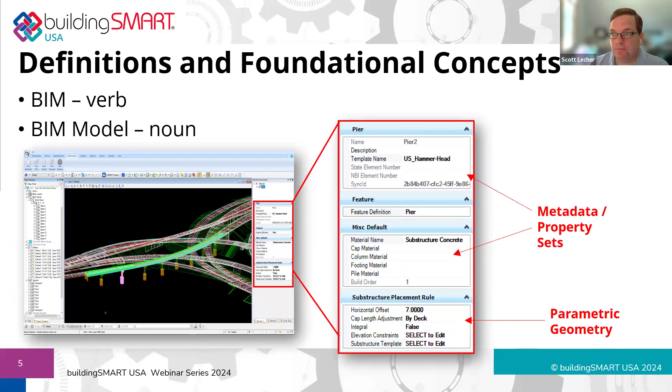Okay, so a few openBIM principles. I'll step through this quickly, but essentially, I like to think of it as primarily a collaboration process, and it's vendor neutral. So it allows folks to work in the environments that they're most comfortable with, and provides you the ability to work in the best tool for the job, and not necessarily have that dictated based on potentially external factors like where your data is being hosted.

In terms of openness, the open part of BIM can mean multiple things, right? Primarily, in my view, this means a published specification that's open, that can be used for developing and sharing and understanding the exchange of engineering data. But it can also mean open as in it's easy for you to open it and take a look at it. For example, here we have an example IFC model in the most common file format, the plain text STEP physical file. You can actually open it up in something like Notepad or VS Code and take a look at it. Now that may not be the way that most people interact with IFC, but it is a potential.

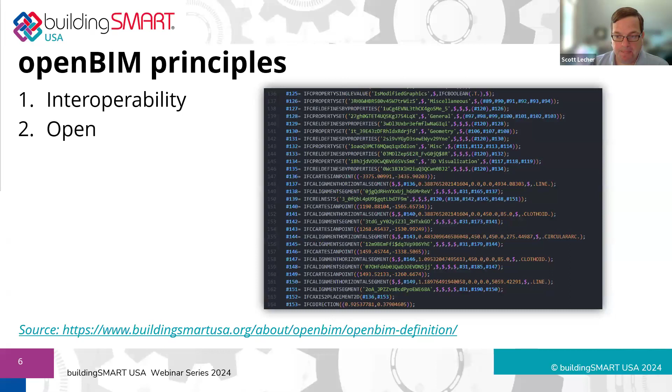Because of this openness and because of it being openly documented and tested, that adds reliability to the process. And I had mentioned collaboration, right? Everybody gets a seat at the table, regardless of their particular tools or workflows that they like to bring. And then flexibility as well. And ultimately, there's also the concept of sustainability, right? Over the long haul, data that's stored within these formats and to these specifications can continue to be accessed over multiple decades, which is oftentimes the time frame we're talking about with infrastructure assets that have a design life of potentially 100 years or more.

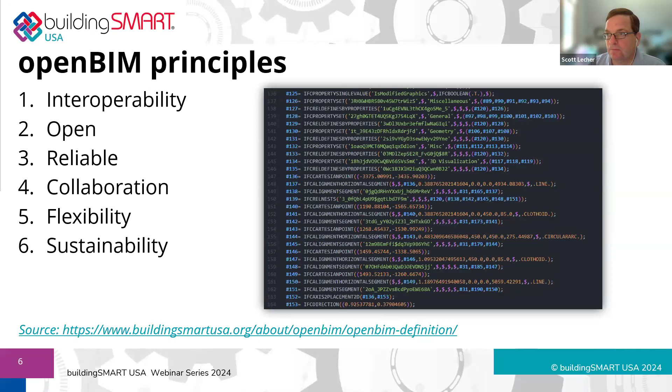So I'm going to hone in on a couple of things that speak to me in particular: interoperability and flexibility. When we're talking about openBIM as part of contractual language or a contractual requirement on a project, we're primarily talking about a data specification, and we're not talking about means and methods. So to do a compare and contrast with what you sometimes see in design in terms of standards compared to what we do during construction.

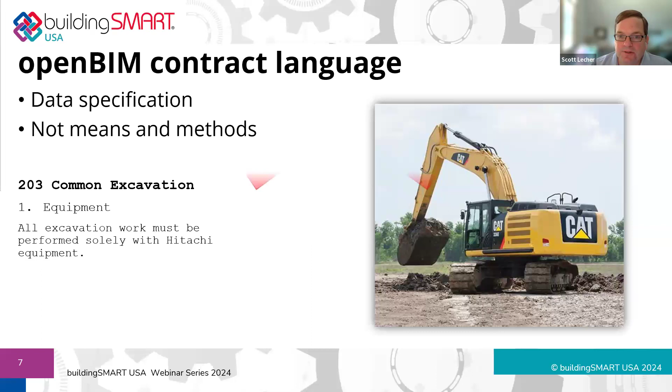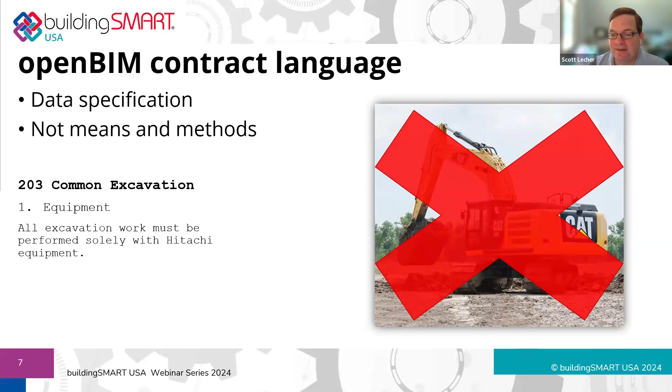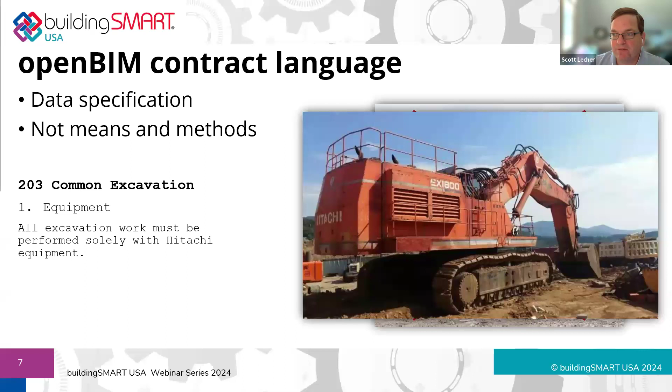Think about if you were reading a construction specification specifically around common excavation. One of the things that you wouldn't see is a restriction on the brand of equipment that a contractor is able to use, right? Because that would be very much dictating means and methods. So just as an example of what you wouldn't see: a spec that says only a particular brand of equipment is allowed here. And so, this is better. The point here is that you wouldn't see this in construction, and so it begs the question of why we see that sometimes in design during the development and procurement phase of our projects.

Okay, so what I see as the foundation of openBIM is Industry Foundation Classes, or IFC. As I mentioned, this is the main specification for the data that we're talking about with openBIM. Again, standardized, digital, open, and international in scope, and has multiple use cases. One of the things that I'll mention a couple of times, and we'll get into in more detail later in the presentation, is not to think of IFC as a file format, but rather as a specification for the data.

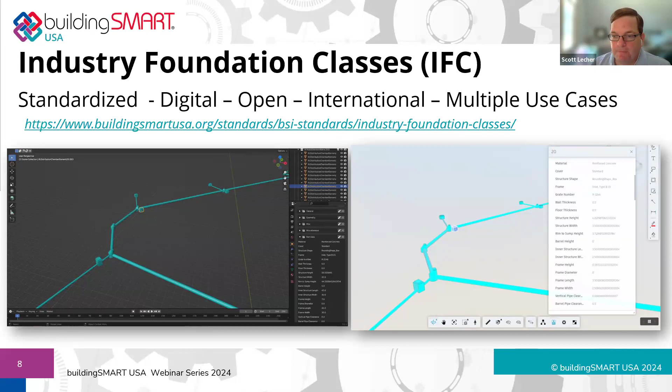Okay, so I mentioned as part of the demystifying approach that I was going to draw some connections between openBIM concepts and generally familiar concepts in industry. So the first connection here that we'll make is between IFC and DXF. And so I would probably wager that it's a safe bet that most people in industry in our line of work have come across DXF files at one point or another. In some ways it's kind of the lowest common denominator, again, that allows for exchange of drawing information.

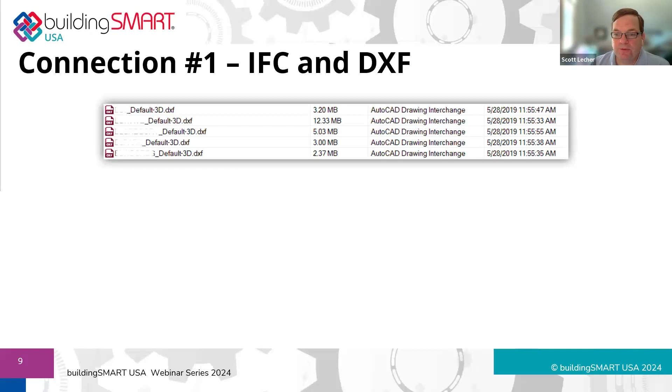So a couple of similarities here that I see between DXF and IFC is that there's strong support and a lot of focus on geometry, as well as being able to segment information into various layers that allows for breakup by presentation, being able to turn certain things on or off, also driving the display of various elements in terms of, say, color and line weight and line style. And also, I think maybe primarily, that multiple tools can read and write this format. And so, as I mentioned, it becomes at least one rudimentary way to exchange information between systems.

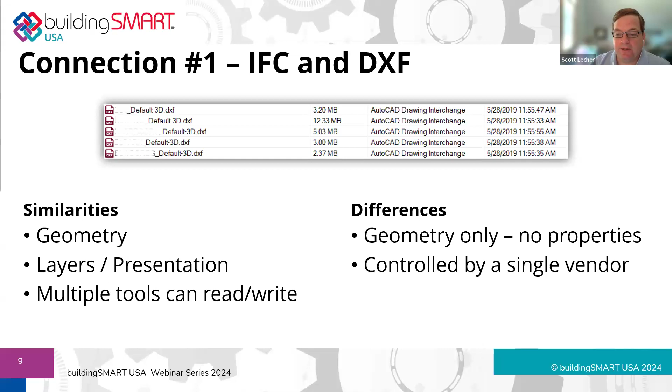So then some differences here, at least on the DXF side, is that it really is geometry only. You don't have the second part of BIM that I had shown previously, the metadata and the property sets. And this is an example too, where the DXF format is controlled and defined by a single vendor. So again, not having the same level of openness and international standardization as IFC.

All right, so moving along, another connection that we can draw is between IFC and an ASCII points file. And at least in my experience, this is most commonly seen in the collection of survey data. So the surveyors and surveying technicians will be out in the field and make their various measurements to collect the data, then process it and adjust it and calibrate it, and then typically it will be delivered in text format, similar to this, either with spaces or potentially commas.

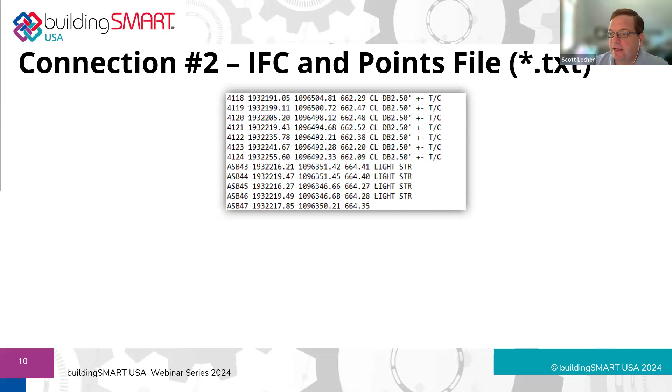And so we've got, again, some similarities here that we'll draw between IFC and our venerable ASCII points file, right? So it's similar in that the points data, like we're seeing here, is vendor neutral, and it's plain text, right? So you can open it in Notepad or another similar type of editor.

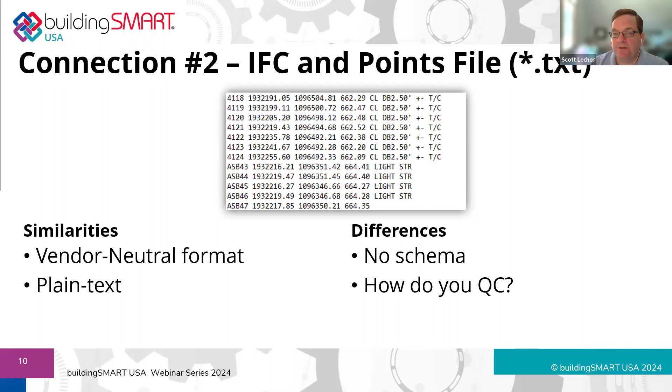But some differences here in terms of the points file is that there's really no schema defined here, right? There usually isn't any information in the header at the top. So you sort of rely on just typical practices of the data normally being formatted with a point number and then northing, easting, elevation, and description. So that can lead to some ambiguities, right? If some of those columns are switched for whatever reason, then you can have some issues being able to effectively share that information and exchange it between systems.

And then also, I think crucially, a big difference here is that the process for doing quality control on points files can be very manual, right? It typically involves opening up your authoring platform and importing this information and doing some visual review. And so oftentimes that can be a bottleneck for the receiving party, that there's some effort there to review the data during the exchange before it's brought forth into the next system and the next step in the process.

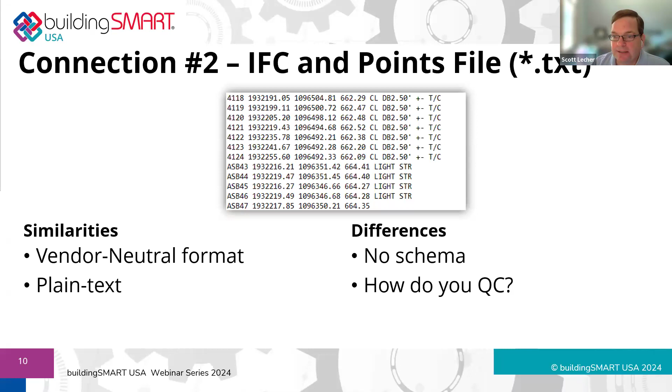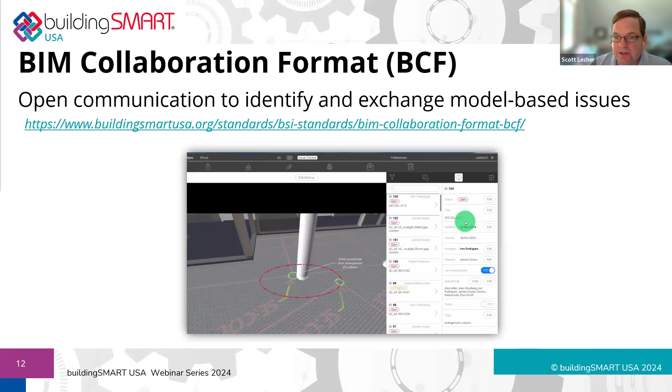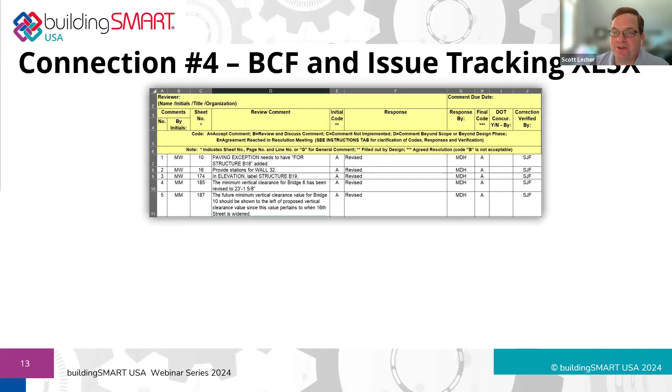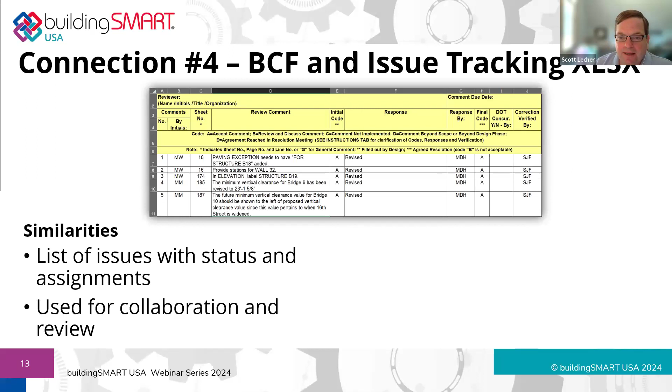So the connection that we like to draw here is to compare BCF to what I would call the venerable issue tracking spreadsheet. And again, this is fairly common across our industry. And so some similarities here is that in both cases, we're talking about a list of issues with status and assignments, and it's used for collaboration and review.

Some differences here with our spreadsheet is that it's really text only. It's not graphically tied to plans or any specific elements or objects in our BIM model. And the specific format and layout will vary and potentially could get broken by the end user, right? If someone's not careful about adjusting columns or adding columns or whatnot.

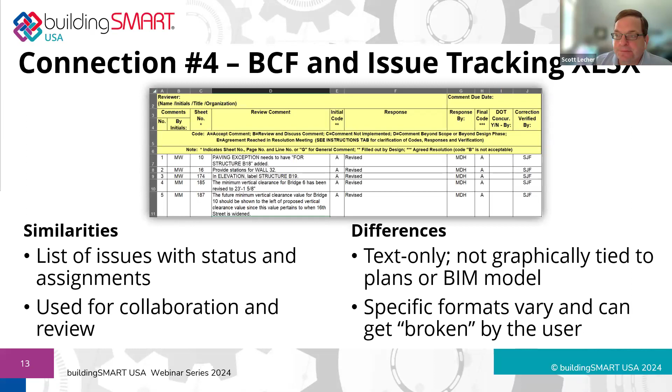So this is a good point that I'd like to make a little bit of a step back and talk about some more recent developments, at least within our organization at HNTB. Within our quality management process, we have standardized forms for record keeping for these various quality control steps. And we can see here on this slide a similar example of what we were looking at before, right? A comment resolution form.

And what we are currently progressing towards is, as we move more and more into digital delivery and work through the application of our quality management systems and quality management processes to digital delivery and model first development, we see a really great opportunity to be efficient across the board by standardizing on openBIM formats like BCF in particular. And so what this allows us to do is to utilize the same process and the same data formats for this part of the quality process, really across the board, across all of our projects, right?

So regardless of the software tools that are being used for authoring the models, and any tooling or systems that are being used for collaboration and review checking, similar to what we had talked about. As long as these systems support BCF, then that allows us to get to a common point where we can aggregate all of that information and then report it in the same format that all of our designers and practitioners and project managers are used to and familiar with, and provides the same quality record across the board.

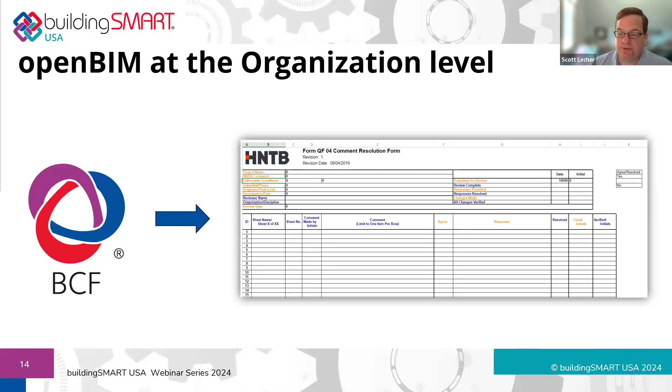So this is really valuable to us and promising to us, because it means that we can develop this workflow once and then apply it essentially universally across all of our projects. Again, regardless of what specific software tools are in use on any given project.

Okay, so moving along in openBIM terminology to information delivery specification, or IDS. So this is a machine readable specification to define the requirements for an exchange in an information exchange. And IDS is much newer than IFC. The initial version 1.0 has now reached final status. And I believe this has happened pretty recently, maybe just in the last month or so.

Some examples here of what we have started to use IDS for. This particular example that I'll talk through comes from a project where we're doing a significant amount of subsurface utility engineering and modeling as well. So anyone familiar with that type of work, you've probably heard of the quality level designation. And this is part of multiple standards that are documented by ASCE, amongst others.

But the quality level sort of refers to the ability of a downstream user to be able to rely on the information that is modeled or provided as part of those model elements, right? And so because these items are underground, it's hard to access them. And if it's something that's maybe been in place for multiple decades, then it's common that it's hard to find the records of what was actually built, what materials, how deep they are, location, all of that sort of information.

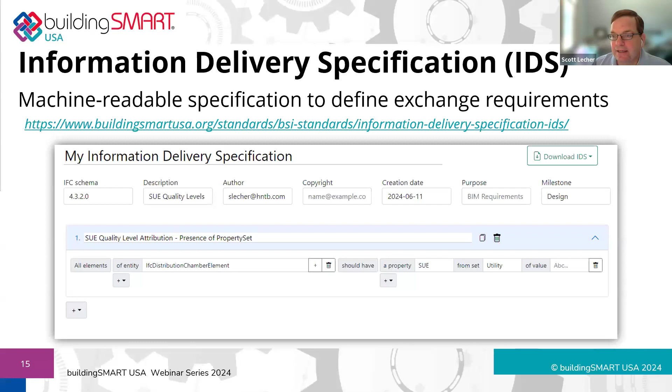And one of those requirements is that all of the model elements have a property set that's called utility, that contains a property called SUE, S-U-E, for subsurface utility engineering. And the values need to be either A, B, C, or D. So here on this slide, we see one example of a potential web-based interface for building out those specifications. And then you can see in this example, there's an option to download the IDS file.

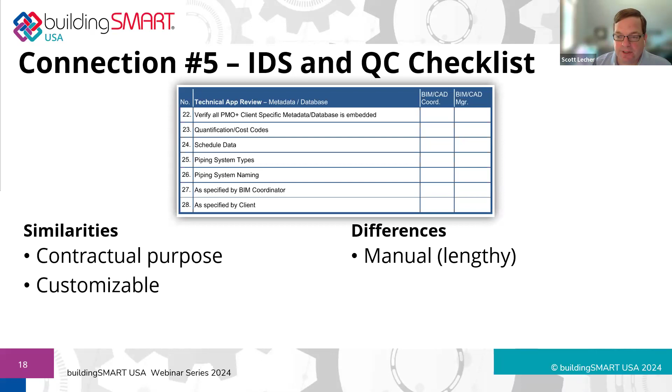So then some differences here in terms of the QC checklist approach, that it's a manual checking approach and can take a lot of time because of that, as compared to what I had said in the example with checking the utility networks, of being able to check thousands of objects in a matter of seconds. The other item that is a little bit unique that I'll talk about a little bit more here is integration with the buildingSMART Data Dictionary, or bSDD. And so the data dictionary is a standardized way of publishing these information requirements that IDS can then check against, right?

So if we think back to the example where we were defining the specification for quality level, we had to specify the name of the property set and then the name of the specific property, and then list those 4 values that would be considered valid for that particular specification. So all of those types of requirements can be stored in a data dictionary, and then it's online and it's in a single spot. And so then that data dictionary can spell out all the requirements for an information exchange.

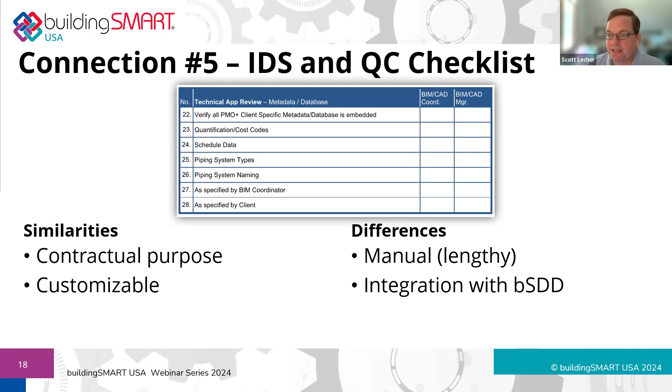And in our current discussions and work that we're doing with the transportation agencies in particular, we're talking through what that looks like with things like pay item information. So an agency could publish the pay item names and numbers and units as part of a data dictionary. And then you could utilize IDS to check models against those requirements as part of quality control during an information exchange.

And then there's also a similar parallel here for us at the organizational level, utilizing IDS, again, as part of our quality management system, and being able to standardize on that in the spirit of openBIM, and providing the flexibility of having one process, one tool chain, so to speak, that handles model checking for us across all of our projects, again, regardless of the specific software tools that are being used on the project.

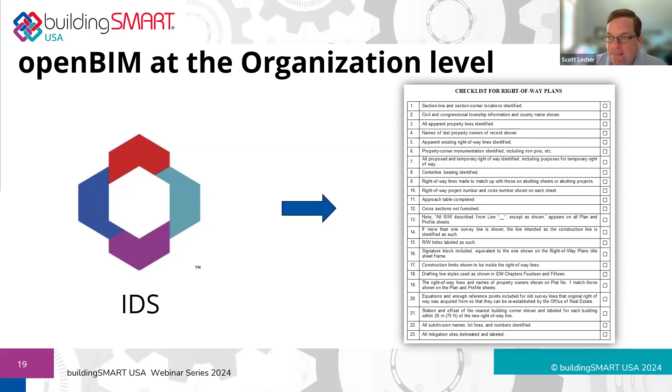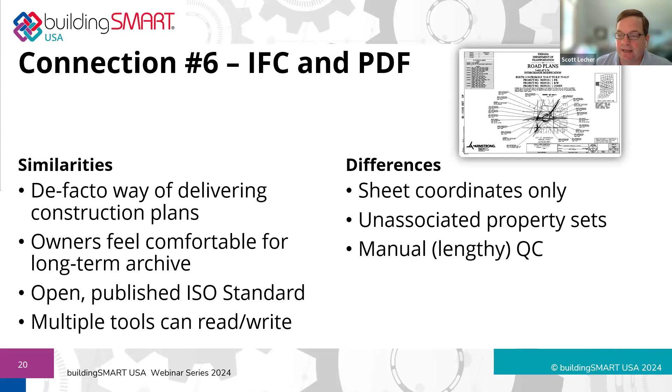So lots of benefits here in terms of the similarities. Some differences when looking at PDF compared to IFC: essentially we're just operating within sheet coordinates, and PDF at its core is really more about a set of instructions for painting a picture on the screen, more so than actual geometric data. In the case of PDF, you may have property information that's part of the sheet, but it's not necessarily associated to its corresponding geometry. And again, a familiar refrain here is the lengthy process of QC of PDF sheets compared to some of the things we can do with IFC, in particular IDS and buildingSMART Data Dictionaries.

Okay, so we'll shift into part two here and cover some additional new ground compared to the presentation from last year. So I want to talk about model validation, and then also talk through some examples of openBIM in action for digital as-builts.

So first, in terms of model validation. I've mentioned this a couple of times in terms of thinking of IFC as a schema and not a file format. And technically, there are even multiple valid file formats for IFC exchange. The most common is the STEP physical file, .ifc. But there's also a zipped version of that as well that could be utilized, or XML-based file formats for IFC exchanges, as well as RDF and TTL for more semantic web modeling of the information.

But when we're talking about model validation, again, we're thinking of it as a schema, and a good way to think of a schema is a specification for your data. And essentially this boils down to a pass-fail test, right? You're looking at the data in a model and determining: is this valid? Is it in accordance with the specification for the data or not?

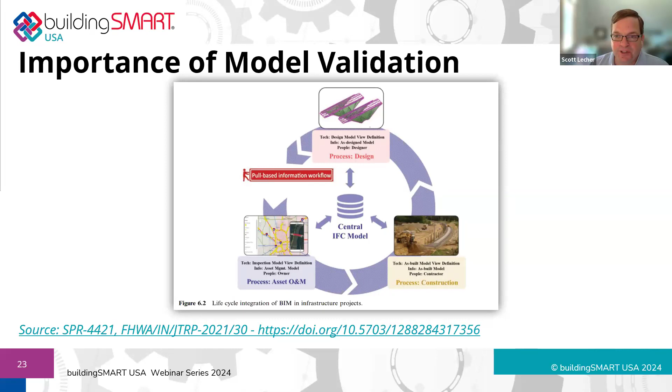So for this concept to work, you really need robust policies in place in terms of data governance—what's accepted in this central model—and also heavy-duty validation capabilities. The old adage of garbage in is garbage out.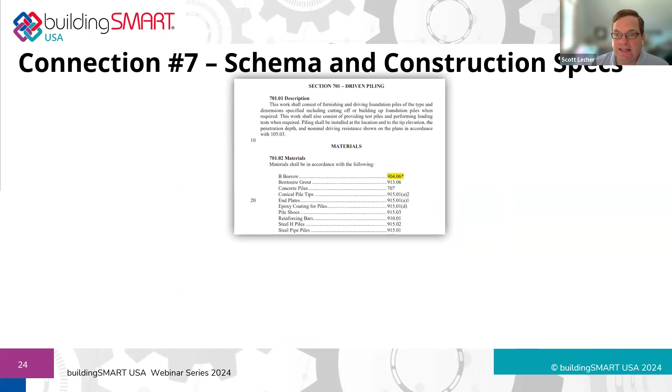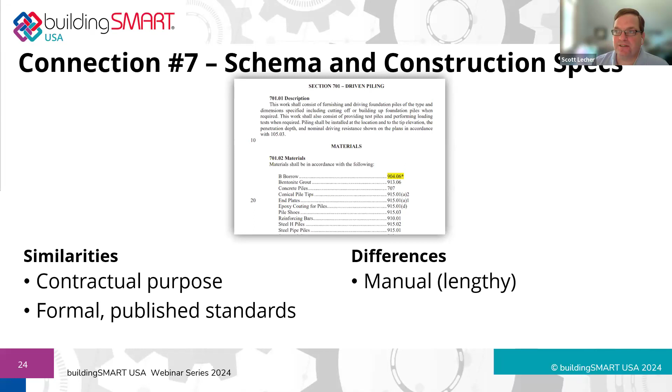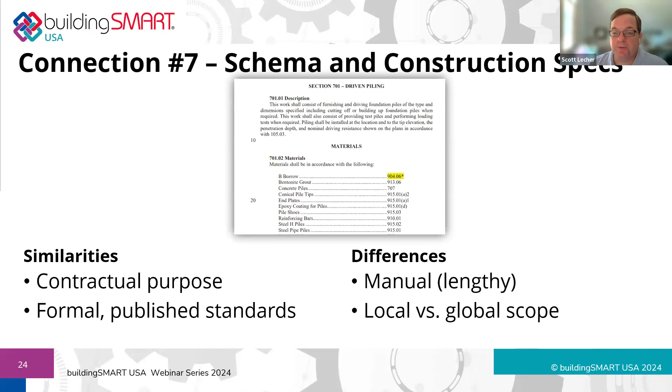This leads us to the next connection: relating this schema to construction specifications. Both concepts serve the same purpose in project delivery and are both formal published standards, but a common difference is that interpretation and enforcement of construction specifications is a manual effort that can take a lot of time, particularly when there's disagreement between parties on whether the specification has been met. Also, for transportation work, construction specifications are often fairly narrow in geographic scope, maybe at the state level, as opposed to the global scope of the IFC data specification.

There are a lot of other things that aren't being checked. Because the validation service is international in scope, it doesn't check anything project-specific, national-specific, or organization-specific. At that level, that's where other items like IDS can really come into play.

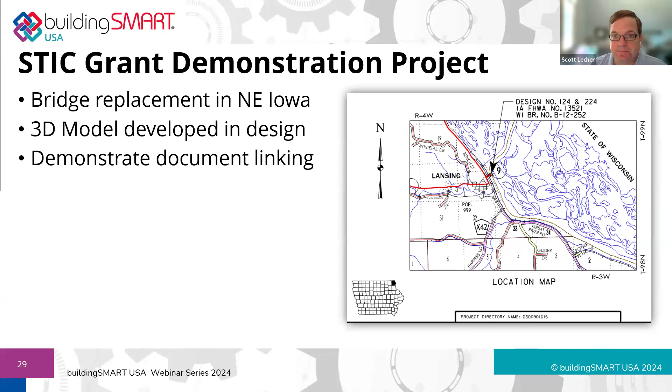So some specific components of this demonstration project: we're looking at a web-based interface and utilizing the 3D model as that user interface. The idea being that if you're looking for information about a particular location in the truss, you can go to the 3D model, click on those elements, and have that lead to links to the associated documentation. Again, the focus on openBIM in this case, so the latest IFC 4.3 data specification for the model.

We're also lucky to have the opportunity to collaborate directly with the pooled fund BIM for Bridges and Structures team, to talk through some of those work products like the Information Delivery Manual and other outputs from that pooled fund study, to help make this a demonstration project of openBIM in action.

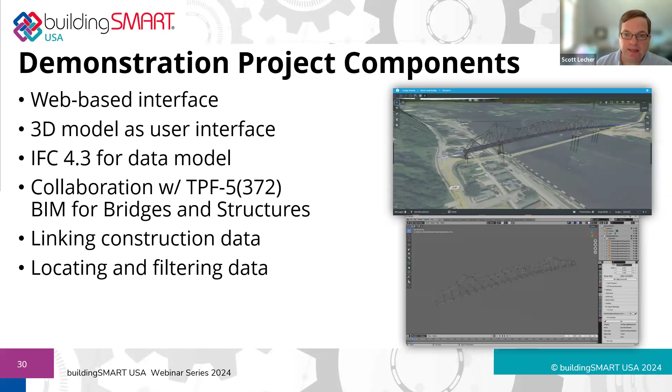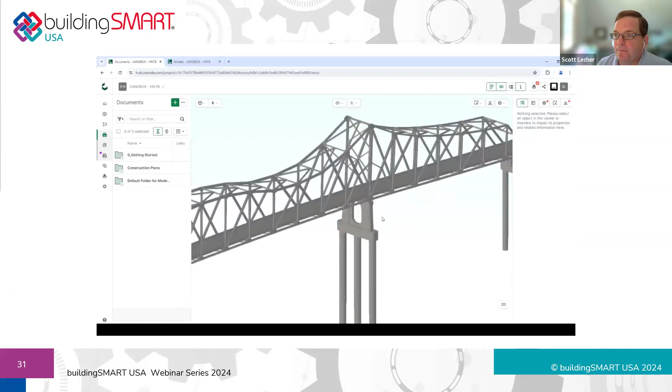I mentioned we're looking to link construction data and be able to locate and filter that information efficiently. Here's an example of what that can look like in terms of some very early work we've been doing. This is our model in our online platform - an IFC model that we've exported from the Bentley authoring platform. We did this in multiple exports to reduce file size and make things more efficient, and then federated everything back together here within the viewer.

At this point, there are some early deliverables and early shop drawings filtering in, but for demonstration purposes today, what we'll see is 3D elements in the model that are linked to their corresponding sheet or sheets from the construction documents, from the bid plans. So no specific construction phase information data yet, but it's a good demonstration of the concept of the 3D model as a user interface to access the sheets.

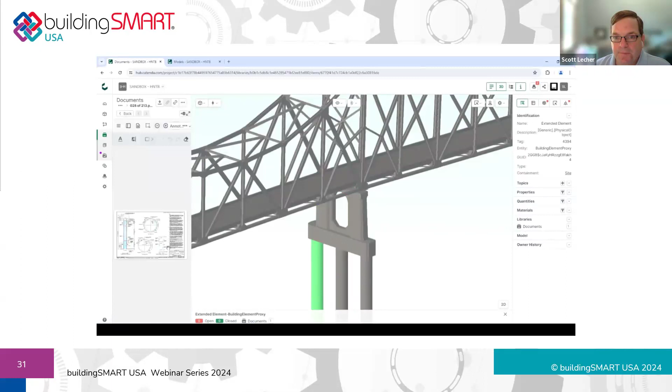We can see here we've clicked on the pier and we've got that highlighted, and that's linked to our plan sheet here, giving us all the various details and dimensions of the pier. Then we can come back and do the same for the drilled shaft foundation - we see the link here as well, and can view it in a thumbnail or expanded out into a full view.

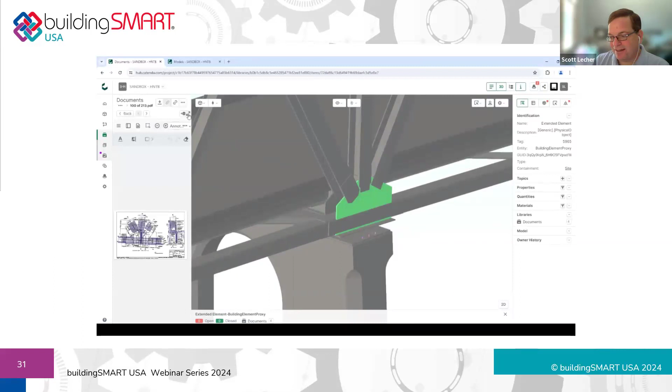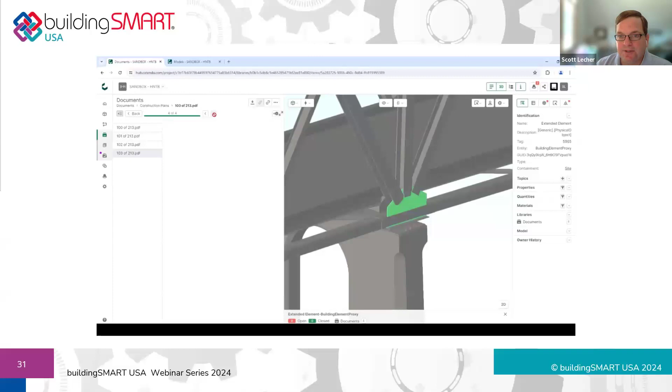And then moving into the truss superstructure, this particular node at the bottom of the truss. And so as you might suspect, because of all of the complexity of all these connections and gusset plates and bolts and everything that's happening, there are multiple sheets associated here. So we can see that in this case, we've got 4 sheets and we can step through those and look at those. And again, get a quick thumbnail to confirm that it's what we want to look at, and then expand it out into a full size view if we'd like to.

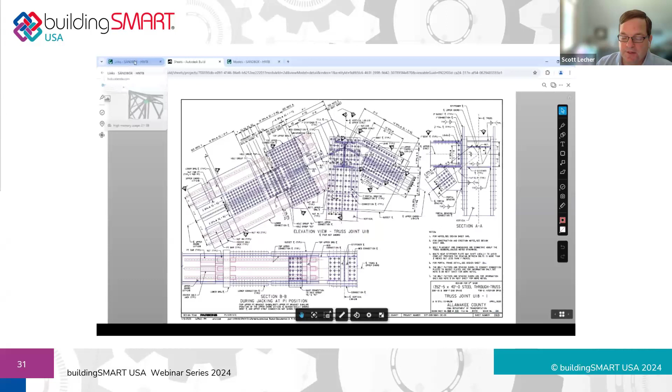So yeah, again, just kind of stepping through this as a demonstration of what openBIM looks like for a real life bridge project here in the United States. And so then kind of the last example on the upper node of this truss. So this is document linking, and in this case, we're linking to plan sheets that are stored in a separate system, right? So coming back to that concept of interoperability between systems, that if the model is in one location and the sheets need to be stored in a different location, you can do that from a hyperlinking perspective and not necessarily need to have all of that data in one single repository.

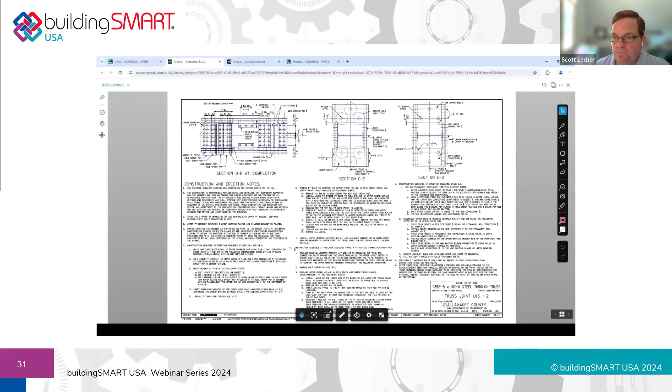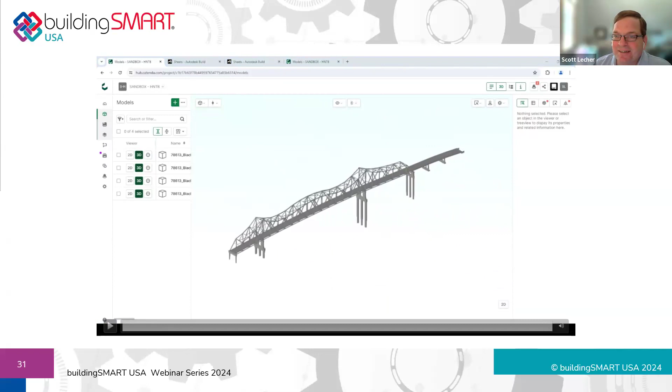Yeah. And then as we zoom out here, you can see, again, we've got the bridge broken out into 4 different models here. They all start with the same name, so you maybe can't tell that. But again, providing some breakdown and being able to turn superstructure on and off compared to substructure and items like that.

Okay, so we're getting close to the end here. I wanted to do a quick preemptive Q&A before we get into more Q&A, specifically around the question of how do we do quality control if the model is our legal document or deliverable, right? And this is a common question. And again, pointing to things that are common in industry now. This example here of what I think a lot of us are used to in terms of a record of a quality check having taken place, right?

That we have our plan sheet with all of the highlighted information being checked as correct, and then some color coding comments and markups as things are revised that need to be corrected. And so, I think it's safe to say that most practitioners in industry are familiar with this, and I think it's also safe to say that if the plan sheets have been through this process, most folks would be comfortable providing the corresponding electronic CAD files. But the point here is that if you're comfortable with the electronic data as part of that exchange, it's because you have done the quality check and the quality review of the representation of that data in the plan sheet.

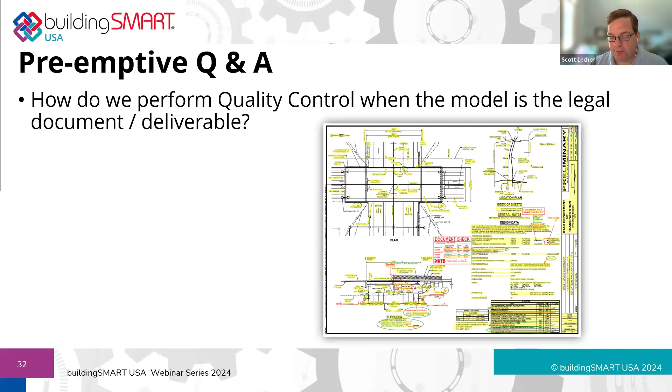And so then as we move to model as legal deliverable or model as legal document, there's still the opportunity to do similar checks, even if the model is primary in terms of the contractual source of the data. So what we'll show here is the fact that with modern design and BIM modeling, when it's set up and utilized correctly, essentially there's no difference between the model and your plan sheets because your plans are being generated directly from the model.

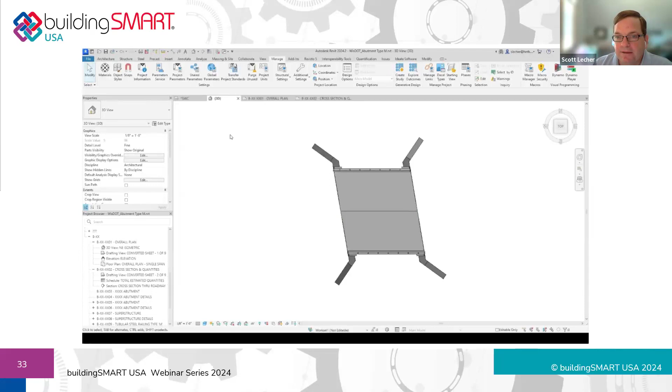So in this example of our bridge project, we've got a number of different parameters here that we've set up to drive the geometry. And you can see as we adjust those, like if we adjust the span or if we adjust the skew, you can see the 3D model update here immediately in our view. And then if we spin over in isometric view, you can see those items updating as well. Right, so this is kind of our initial step in terms of doing our modeling.

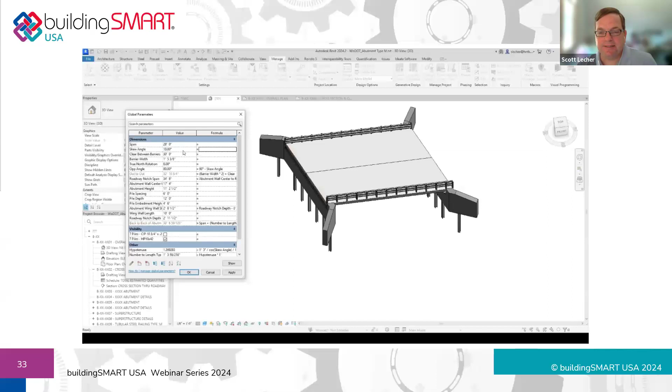But the next step then in the project delivery process is to create the views of the model, the different slices or different views of the model that then become the various parts of our plan set. So then here, let's see, we'll reset some of these parameters back and then jump into what that looks like in terms of the plan sheets themselves.

So again, we've got the same list of parameters that we're able to drive the model. And in this case, on this plan sheet, we even have an isometric view of the model. But we can see when we update those parameters that the model, as well as the view of the model here in the plan sheet, updates as well. And we can revert that back. And if we want to adjust skew angle, we can see that update. Now, in this particular example, you'll notice that the dimensions are static.

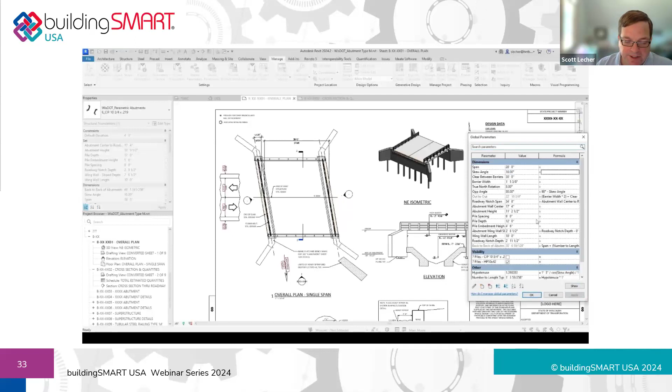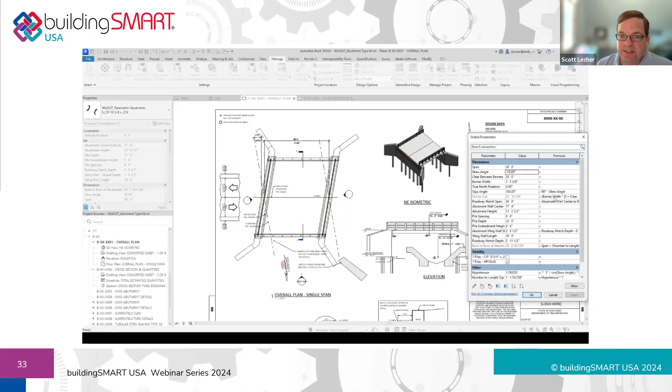And that's just because we've imported those as placeholders from a static DWG file. But obviously within your authoring platform, you can set up all those dimensions to follow the geometry as necessary. So then here's another example, looking at the elevation of one of the abutments here. And so we'll change the parameter for the wing wall length, and you'll see that update immediately in the sheet here as well.

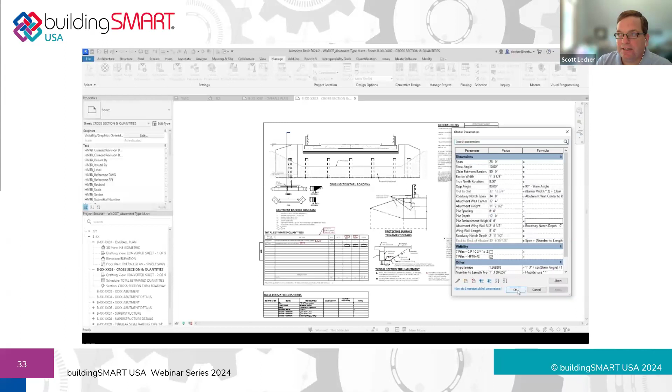And then we also have parameters for the piling as well. So you'll see here in this demonstration, we'll adjust those next and see that update directly in the model. So I guess to tie a bow around all this discussion, if we focus on the model, have that as our primary focus during the delivery, then we can still create sheets. And I think there'll be quite a long period where we are still creating some number of sheets as part of our delivery process to go along with the model deliverable.

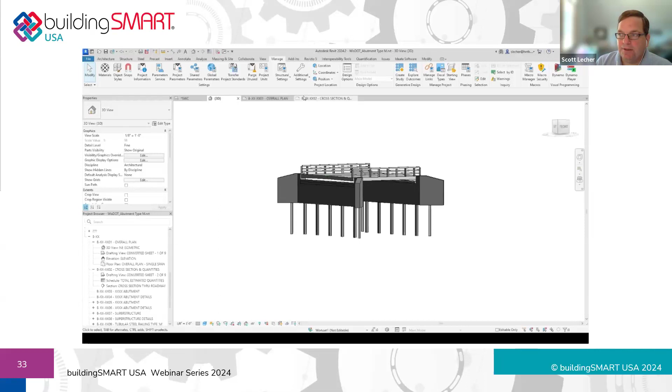But I guess the point is slicing your model and creating the sheets that we're used to and doing a quality control check of those sheets then becomes a de facto check of the model, right? So boiling it down to a single sentence, if your plans are derived directly from the model, and you check the plans and you're happy with what's shown in the plans, then that also becomes a check of the model data as well.

Okay, so a couple of closing thoughts here, and we can open it up for some Q&A with the time we have left. Obviously, this whole concept of BIM and digital delivery is very disruptive. I think probably every bit as disruptive, if not more, as the transition from board drafting to computer-aided drafting. And I think we're seeing an overall increasing volume of information, an explosion of data, right? Even things that I hadn't really talked about, like reality capture in LiDAR scanners and drones and photogrammetry, point cloud data, sensor data from all sorts of measurements and things that we can attach to our infrastructure.

But I think truly, if we look at the internet age, everything about the internet and about our current digital lives is based on open standards. And I firmly believe that's where things are headed as well in terms of infrastructure and openBIM for infrastructure. And maybe my closing thought is that all these platforms and the vendors really should be competing solely on their merits, features and capabilities, and not so much on inertia or market capture.